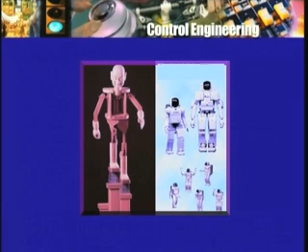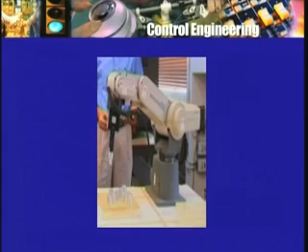Not a very difficult job for a robot or an automatic system to do. Pick up something from a place where it is expected to be, a known thing, lift it and put it down at some other specified place. Does not require too much smartness. Now in this case, the movement of the robot arm can be completely predetermined. So the robot arm moves in a particular way, starting from, say, some standard position, goes down to that object, and then if it is holding the object with a pair of pincers, some specific action of the pincers will take place, and the robot arm then will swing around till the object is very close to where it is to be put, and then the pincers will release the object.

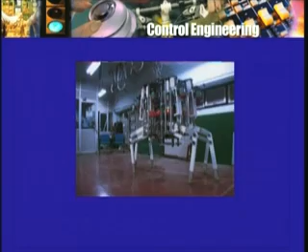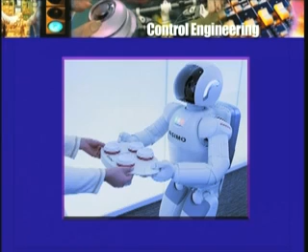So there is no feedback being used here. Of course, the robot engineer has done his previous calculations as to how the movements should take place, and somehow he has arranged for those movements to take place as the robot goes on doing its job. But there is nothing online, so to speak. There is a definite sequence of actions, and the robot follows that sequence.

Of course, as we can expect, if something goes wrong, the whole sequence will still go through, but it will result in some problems. For example, suppose the object which is to be picked up is missing for some reason. Then what will happen? The pincers will try to close on that object but will fail to close, and maybe the robot will just swing around and take that object, which is not there in its jaws or pincers, and put it down, and of course there is no object to put down.

So even with such simple robots, there may be some overall supervision required, or some feedback in the form of whether an object has actually been picked up or not may be built in. So once again, as I said earlier, there is hardly any control system which does not use any feedback.

One more example of a different kind, and which is in the news nowadays, it has been there for some time, is that of launching a satellite. That involves firing a rocket from the ground and taking the satellite up to a particular height or altitude, and then launching the satellite into a suitable orbit.

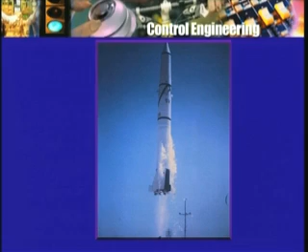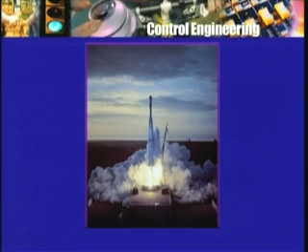Now in this case, once again, the space agency people do all the calculations previously as to exactly how the rocket engines should be controlled, how the orientation of the rocket should be changed, when the satellite should be released, when the thrusters which the satellite may have to orient it properly should be fired, for how long, and so on. All these things are pre-calculated.

But once again, there is usually some feedback on top of it. The space people will check whether things have actually happened the way they were supposed to happen. For example, the orientation of the rocket, the orientation of the spacecraft, and so on. Although they would have done their calculations beforehand, and they are more or less sure that things will go according to their calculations, still, finally, some element of feedback is necessary, because things can go wrong.

So there is this difference between pre-timed, pre-programmed or predetermined control action versus control action which is online, so to speak. That is, what will happen will depend on what has actually happened. The traffic control system was a pre-timed or pre-programmed system, so also the robot doing a very simple job, and the launching of a satellite would also be of the same kind. But if we come to the air conditioner example, there the action is a little different.

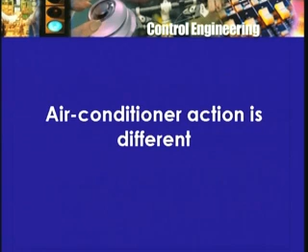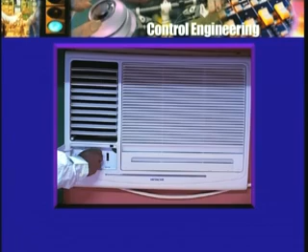I mentioned that the air conditioner's thermostat does not really maintain the temperature absolutely constant. The kind of air conditioner I talked about required that the air cooler be switched on and switched off.

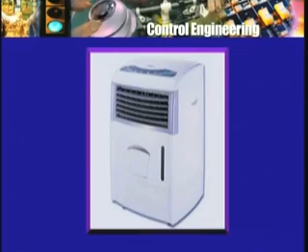As the outside temperature is high and people have come in, the room is hot, so the air conditioner is turned on. The temperature is higher than desired, so cooling is kept on. Then the temperature reaches the desired value and perhaps goes slightly below it, so the cooling will be turned off.

Because of the heat of the people present or changes in outside temperature, the temperature will start rising again. This time, when it exceeds the desired temperature slightly, say 27.1 degrees Celsius, the air conditioner will be turned on again. So there is an on and off action taking place all the time.

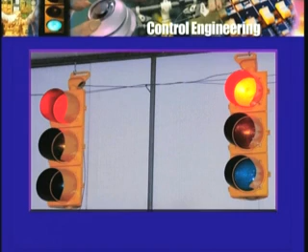However, all this is not predetermined or pre-timed. It is not that the compressor will be on for 30 minutes and then switched off for 15 minutes, and so on. Unlike a traffic signal cycle, where the signal is green for 1 minute and red for the next 3 minutes, back to green and so on, the action here is not pre-timed.

Of course, if one could know beforehand what was likely to happen—for example, if the outside temperature was going to remain absolutely constant at say 30 or 35 degrees Celsius, people in the room were going to be there all the time, and there was not going to be any heater or other source of heat—given such ideal conditions...

...it would be possible to figure out an on-off cycle, or to select the volume of air circulated or its temperature, so that the room temperature is maintained exactly at the desired value. In our case, it was 27 degrees.

But all this is under a very ideal situation: the outside temperature remains constant, the inside sources of heat are not changing, and therefore a constant amount of heat removed results in a constant temperature of the room.

If one could know about all this beforehand and pre-calculate everything, then there is no need for feedback, no need for a thermostat to check the temperature and turn the air conditioner on or off. One would have made calculations beforehand, set the desired volume of air at a specific temperature, and be confident that the desired temperature will be obtained.

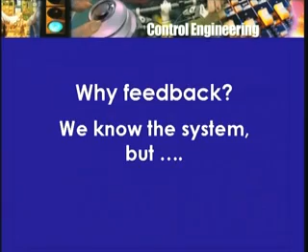But in an automatic control system, one will need feedback for reasons of this sort. The system one is supposed to control, one knows about it fairly well. In fact, you cannot control something if you know very little about that system, or devise a control system unless you know what that system is like.

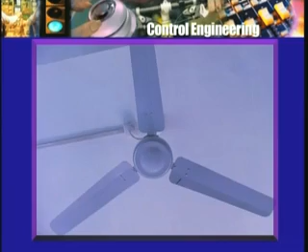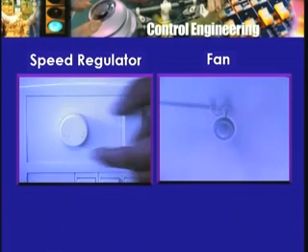Take the simple example of a ceiling fan. What kind of regulator and what design one should have will depend on the fan. If it's a small fan, you need a regulator of a particular rating, since only so much current will flow. Whereas if it's a big exhaust fan for a large hall, a current of a different magnitude is involved, and the regulator must be appropriately selected.

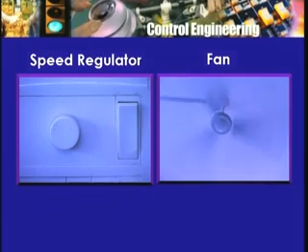So depending on the job, one has to select the control system. You have to know the application, the motor, the oven, the tank, or whatever it is you are trying to control. On the basis of that knowledge, you design the control system and make all the calculations.

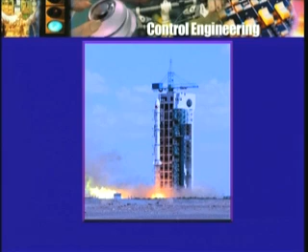Think of the rocket satellite example. We know what kind of rocket engine, its weight, the fuel, the rate at which thrust will be produced, and so on. So obviously we have to know the system before we can control it or devise a control system for it.

But then why is it that one needs feedback? Well, one needs feedback for the reason that although one knows the system to the extent possible, one may not know it to 100% extent.

Very often there are things in the system which you cannot determine beforehand very precisely. There are things which might change with ambient conditions. No system is completely isolated so that it is guaranteed to behave exactly the way you expect it to.

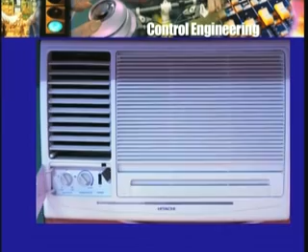Take the room air conditioner example. We have control over the room air conditioner, but we have no control over the sunlight, unless you want to design some control over the sunlight. So whether it's going to be cloudy or sunny, what the temperature outside will be, whether 35 or 30 degrees Celsius, how many people will be in the room, how many lights will be on, maybe some other sources of heat, the cooling capacity of the compressor - all these things, although you try to find out beforehand as far as possible, are not fully known.

A general broad term for this could be uncertainty. You are not very sure about the system, or more important than the system, perhaps about the surroundings, about the environment in which the system has to work.

A typical example of uncertainty is power supply voltage. In fact, even the existence of a power supply, one may be uncertain about. And so we have standby or backups. So in case the power fails, like for example you are watching me on your TV screens, if the power supply goes and you want to continue watching me, you will have to provide some standby power supply.

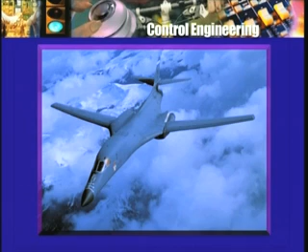So there is a difference between a parameter change or the lack of complete knowledge or uncertainty about a parameter value, and a disturbance like a sudden increase in temperature, say the sun coming out of the clouds, or in the case of an aircraft there is some turbulence or a sudden gust of air, maybe the weather is stormy, the aircraft is flying through a cloud, and so on.

So you have uncertainty, you have disturbances, because of which what you may have pre-calculated or predetermined may not produce the result you expect. So if you want the system to be controlled properly, you would like to see what is actually happening and take any corrective action.

If the supply voltage has gone down and because of that the intensity of some light is low, or some current is low, then I may intervene if an operator is sitting there and try to adjust things so that the current is brought to the expected or desired value, and so on.

So this is the reason for using feedback: what you expect may not happen, and so one would like to keep watching constantly, monitoring, measuring, and then change the course of action or take an appropriate action.

Now this is what the thermostat is doing. The thermostat monitors the room temperature, and the moment the room temperature goes above a certain value, maybe because of environmental factors or a lot of people coming in, the thermostat turns on the air conditioner. After some time the temperature goes down, maybe a lot of air has been circulated or the outside conditions have become cooler, the temperature goes down, and the thermostat intervenes again and switches off the air conditioning.

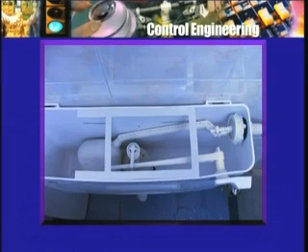One of the earliest industrial examples of feedback - I don't know whether you have read or heard about it - I mentioned, of course, the ancient tank filling and flushing system, and there is feedback used there, although there is nobody watching, there is no literal measurement being made. But the float valve is an arrangement that provides for the inflow to stop when the water level reaches a certain height, and then when the water level falls below, the flow begins. So that's a very ancient example, but that was not for an industrial application.

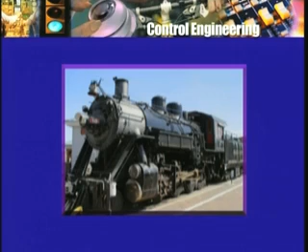One of the earliest for industrial applications was for the control of the steam engine. Before the steam engine was used for locomotives, that is for providing transportation, it was being used basically for grinding of grain for mills, and then subsequently for various other operations.

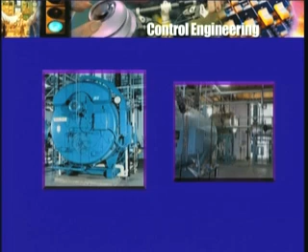Now the steam engine, of course, uses steam coming from a boiler. The boiler has water in it, it needs a fuel supply. Then there is the wheat which is to be ground, the amount of wheat, the quality of wheat, the condition of the grinder. All of this can result in a situation where the grinding is not proceeding satisfactorily because the steam engine is not producing a proper speed of the shaft of the grinding wheel.

So let's say it is desired to keep the speed of the grinding shaft constant in spite of, or irrespective of, maybe the quality of the wheat, maybe the quality of the fuel used in the boiler, and things like that.

So if a human being were to do it, he would see that the speed is falling, the grinding wheel is slowing down, and so he would control a valve which will admit more steam into the steam engine. Of course, to produce more steam, you may have to increase the heat given to the boiler, and because the steam is going to be coming off from the boiler in larger quantity, you may have to check the boiler water level and whatnot. So a human operator would do the job, and would do it reasonably well, but as we said earlier, the reliability and the accuracy are limitations.

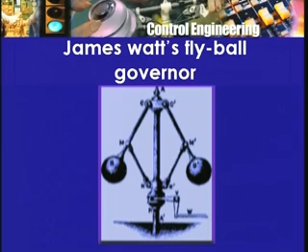So he devised this mechanical arrangement called the fly ball governor, using the centrifugal force kind of action. If the grain was such that less torque was required to grind it, the grinding wheel would speed up, then the two fly balls would fly away with the increased speed. That flying away movement of the fly balls, by some linkage, led to a valve which controlled the steam flow and would reduce the flow of steam.

On the other hand, if there was some problem with the fuel itself, one would have to modify this a little more, but again the same thing would happen. If the amount of steam going is not adequate, the speed would go down, the fly balls would come closer, and the levers operating would open the valve more, so that more steam would be admitted.

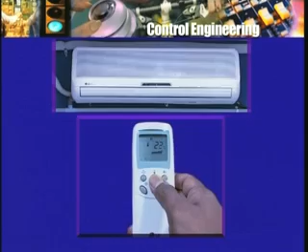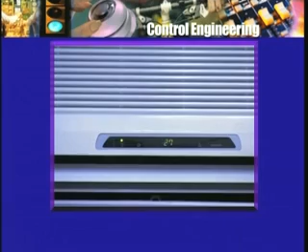This is somewhat similar to our room air conditioner example. The temperature is to be at 27 degrees Celsius, but we find it oscillates between two limits, 27.1 and 26.9 degrees Celsius. In the case of the fly ball governor also, such a thing happens. The speed will not be absolutely constant, but will vary between two limits, though the variation can be tolerable, much less than what it would be without this feedback action.

We'll look at this later on in more detail. This is related to the concept of error, and there are some misconceptions around this concept. In your control theory or control systems book, there will be a long chapter on control system error, types of systems, and so on. But there is some confusion there, and we'll look at it in detail and try to clarify what exactly one means.

So feedback is used because of uncertainty, lack of complete knowledge, disturbances, and so on. For a regulator type system, when something is desired to remain constant, but things may act on it to change it which are not known to us—disturbances, changes in parameter values—it is necessary not just to make some pre-calculations and get the thing going without looking at it, but to keep on monitoring it and make changes that can bring the desired variable closer to its desired value. This is one of the most important reasons for using feedback.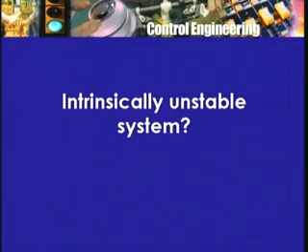In fact, there are hardly any intrinsically unstable control systems. There are—I'm not an aeronautical engineer, but my aerospace or aeronautical friends tell me that an aircraft with its control surfaces for controlling the various motions of the aircraft is what may be called an intrinsically unstable control system. And in fact, if you go back to our older example of a bicycle, then a bicycle also, one can say, is an intrinsically unstable control system.

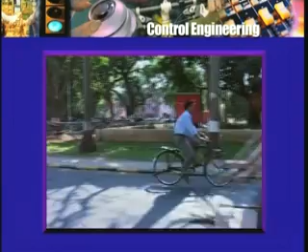If you just have a bicycle, hold it for some time and then leave it, it's not going to stand there just like that. It's going to fall. So a human being riding the bicycle constantly needs to assess what's going on through the kinesthetic sense and keep balancing it. Once in a while something happens and we fail and we fall. So even a bicycle is an unstable system, or what is called, in case of stability, one talks about various kinds of stability, neutral stability and this, that and the other. So you can think over this example.

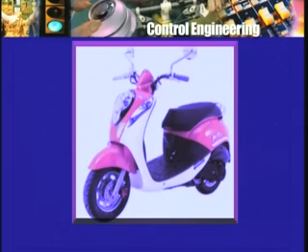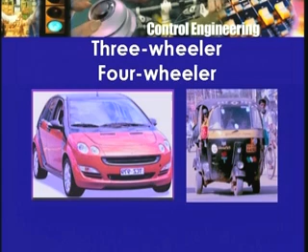Similarly any two-wheeler will most likely be an unstable system, it requires a balancing act. But a three-wheeler or a four-wheeler does not suffer from that problem. A motor car driver does not have to balance his car. Of course, when he steers around a curve at high speed, he has to take care. But normally he does not have to worry about balancing.

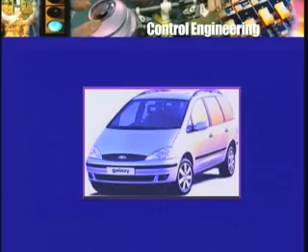So to repeat, the main purpose of feedback is not to make a system stable, or the main reason for it is not because the system is unstable, because in very few cases will the system be unstable to start with. The main reason is uncertainty, lack of knowledge, disturbances about which we don't know, parameter variations, and so on. So the control system designer has to think of how this feedback should be used to control the system when such things happen, when there is disturbance, when there is a parameter change. What kind of changes in the control action should be made?

There are various choices. Once again, we are going to discuss that later. The chapter on control system design is typically what looks at this.

So feedback will almost invariably be used in regulator type systems. There is hardly any regulator type system which you will find that does not have some feedback. In the final analysis, some human feedback, some overall supervisory feedback will always be there.

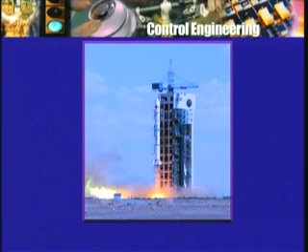In the case of the rocket launch or the satellite launch also, there are so many things that can happen over which you have no control. The weather, as the rocket ascends, the airflow, the density of air, quality of fuel, variations in it. Modeling a rocket motion is not that simple. One has to make approximations. So we really don't know 100% exactly what is going to happen.

So feedback is used there also. At the same time, in that application, one does do some pre-calculations. No system is designed without any pre-calculations. And even the feedback is designed, is calculated. So it's not that you can take anything and not know anything about it and use feedback to control it. You may succeed in doing something, but there is no guarantee that you will do a good job. So pre-calculations or pre-programmed action is useful and important, but at the same time, use of feedback is also very important and necessary.

So this is about one class of systems called regulators or regulator type systems. Let us now look at a different kind or class of control systems or control actions. I'll go back to an earlier example, namely steering - steering a bicycle or a scooter or a motor car or an aircraft.

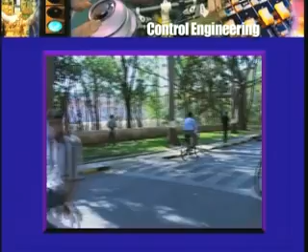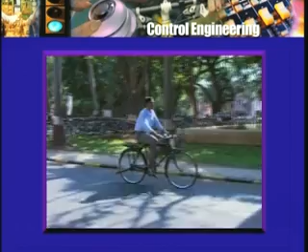Now when you want to go from one place to another and you want to ride your bicycle, is there anything like a regulator kind of action? Is there anything that you want to keep constant, that should not change? Maybe you would like to pedal at a constant speed, but no, that's not the main problem or the main point of what you want to do. You want to start at a particular place and reach another place, and there is a road or some pathway which you have to follow.

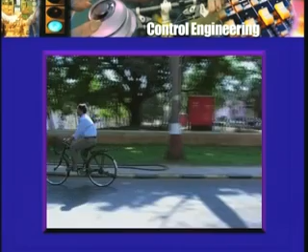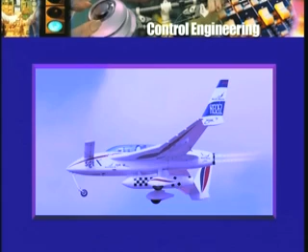Similarly, when you take a ride on your scooter or in a car, or you have an aircraft which flies from one airport to another, you know the path that you would like to follow. Of course, it can happen that you have never been that way before - the path could be new to you, but still there would be a road reasonably well defined so that you know what to do, and there would be some signs which tell you what you should do. Certainly no pilot flies an aircraft without knowing beforehand the geography, the location, the area over which he is going to fly. The word course is used for this - there is a predetermined course which you are required to follow.

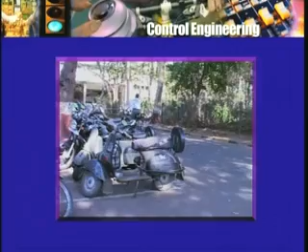And you get on your bicycle and get going. The road is straight, you ride straight. The road has a left turn, you do something to the handlebars and your bicycle turns left. Of course, when it turns left, you take care that you don't hit the footpath or go too far on the right side. There may be an oncoming vehicle. So you are constantly watching what's going on.

By and large, you have to follow a specific course. The course may be predetermined, if it is a bicycle ride that you have been taking every day from your hostel to your department and back using a specific road, then you know it so well that maybe even in your sleep you will be able to do it. The whole course, the terrain, the road is all well known. Everything is familiar.

But the course may not be predetermined. There may be sudden changes. The road is under repairs, it's closed, or a left turn is no longer allowed. So you don't know beforehand what's going to happen, what path you are going to follow. The course is not completely predetermined.

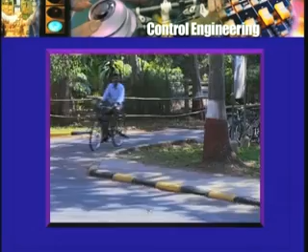Yet you would like to steer your vehicle, and here by steer I mean not only direction but also control the speed. Getting onto the bicycle is one thing, getting off it is another, but maintaining the speed or changing the speed depending on terrain conditions, and keeping the orientation so as to follow the course - all of that I include in the word steering. This is a major control job, and human beings are doing it day in and day out.

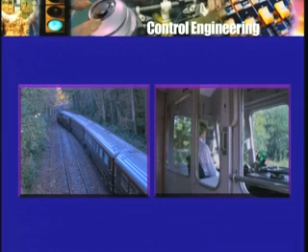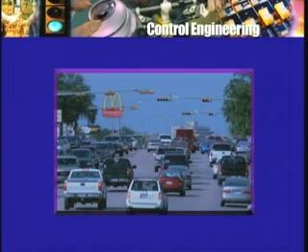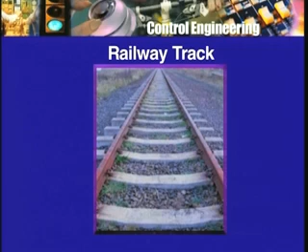The job is a little easier for perhaps the railway locomotive driver. Why? Because the track is already there. Unlike the road, where you have to be on the correct side, not go too far to the left or too far to the right - there may be a ditch, a pile of dirt and so on - the railway track is reasonably fixed, it's maintained properly. In fact, that's a big job, track maintenance.

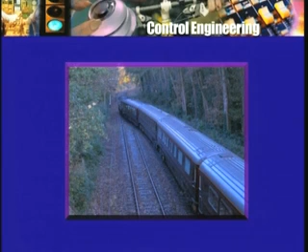So the locomotive driver has to simply start the locomotive, decide upon a speed depending on the speed limit, and keep going. Of course, that's not true - there are other things he has to do. If it's a single line track, then you know what kind of problems are involved. The track condition may not be the same. There are curves, and around curves you have to reduce the speed. There may be an upgrade or a downgrade.

So even there, some control action is required all the time, and it's not completely predetermined, although ideally people are trying to have automatic trains - trains without any driver which will go from one place to another. But even with such trains, the use of feedback will be almost unavoidable, because what you knew about the track beforehand may not actually be the case. It may snow - we don't have that problem in many parts of our country, but if there is snow, what do you do? Even if there is a track completely given to you, with no other traffic, no other locomotive or train crossing your path, no obstacles, there could still be changes like rain or snow.

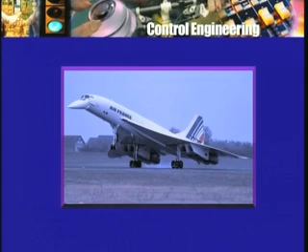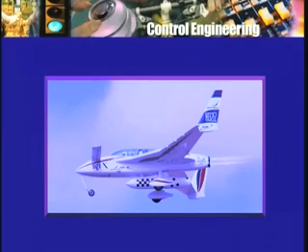So sensing, being on the lookout for what's out there and checking whether the course is correct or not, and if not, making some changes - for an aircraft pilot, this is absolutely necessary, because unlike the railway track, there is no track in the air. So he takes off and tries to set a course and stay close to it, but there are things not under his control. If it's cloudy, there are gusts of air and so on, so he deviates from the course, and then takes corrective action from the actual course so that the desired course is again followed. They have landmarks and so on.

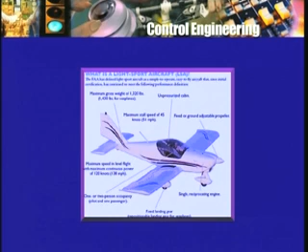So here is a different kind of control situation, which is not of the regulator type. It's not that something is to be maintained constant - temperature, pressure, speed, or what have you. It is that something called a desired behavior, position with respect to time or location on the map, as you fly the aircraft, where you should be at this moment of time roughly - that is known, and you have to try to follow that. You have to try to stick as closely as possible to that desired behavior.

Such systems are called follow-up systems, for an obvious reason - they have to follow something which is being specified. The main thing is that what is specified is not usually specified much beforehand. But as you go on, you are told, do this, stay close to this path, or whatever.

Another name for such systems, and the reason for that name, is the particular application during the Second World War, when aircraft were being used, and even rockets, as we know, were being used as part of the war effort, and therefore you had to devise a system to gun down enemy aircraft or enemy rockets. Today, of course, one would not talk about aircraft and rockets in the old sense, but about missiles.

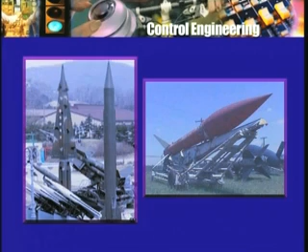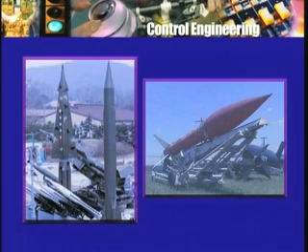And you have to intercept a missile. You have to first of all find out whether there is a missile in your airspace and then track it. This is another term that is used, and then if possible intercept it.

In the Second World War, it was simply a question of enemy aircraft appearing on your horizon, and then you have a gun or a set of guns. So you have to keep on orienting them properly, and then at an appropriate moment take a decision to fire a shot and shoot down that aircraft.

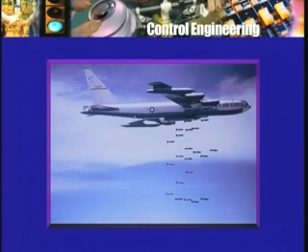This was the time when radar had just been introduced, so it was not really a very sophisticated kind of tracking system. Very soon, as the war effort went on, radar was developed. So you had this thing which detected the enemy aircraft even before you could see it, perhaps, or if it was cloudy.

And the radar would give you the position of the aircraft and also the distance of the enemy aircraft or the target. So you had this target coming to you, which you had to track with the help of the radar. But that's not all. You just did not want to track it and keep watching it. You have to take action of firing a shell.

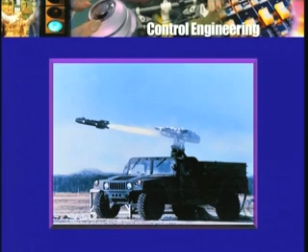And therefore, you have your gun, but the gun is not a small pistol or a revolver. It's a very massive thing, because the shell has to reach maybe an altitude of 2000 feet or a distance of a kilometer or more. So it's a very massive thing, and it has to be moved.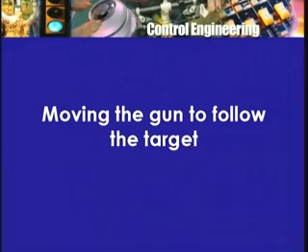So you require a mechanism to move it, and that mechanism would be an electric motor. But you have to keep on moving it to follow the target, not just wait till the target was overhead and then suddenly move the gun, because that would not be possible - it would take quite some time to move it. So in a very crude sense, the position of the gun should follow the position of the target as closely as possible. There's more to it, because it's not enough to know the position.

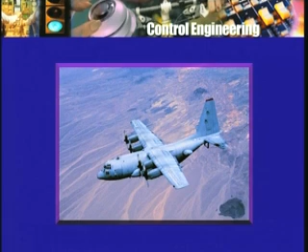One should anticipate what the target is going to do. But at least you should keep track of where the target is, and the gun should be oriented towards the target as closely as possible, so that eventually when you take a decision to lob a shell, there is a good chance of the target being struck.

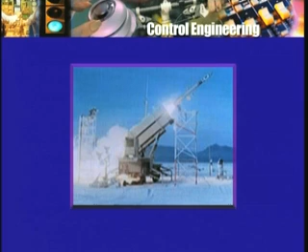Today, of course, things have become much more sophisticated. You have missiles which are launched from Earth, which may be launched from an aircraft. All kinds of interceptions are possible. So certainly this is a very hot topic today. But this is the application that gave rise to this term, servo mechanism.

Servo refers to, or comes from, a Latin word which is there in the English word 'servant' - a slave, essentially somebody who follows your instructions, does anything and everything that you tell him or her. And mechanism, because obviously there was a gun which was to be moved, which required a mechanism, electric power or motor, and ways to control the motor.

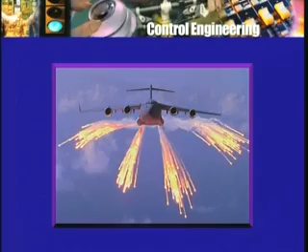Like the aircraft, there are various kinds of controls or aspects of movement of the gun. You can think of movement in a horizontal plane, so azimuth, and then the gun has to be raised or lowered, so elevation - azimuth control, elevation control, and things like that.

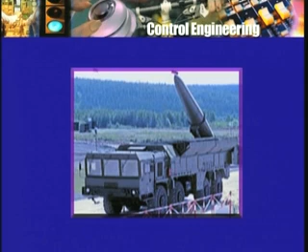Instead of a gun at a fixed location, you may have a gun which can be moved around. And again, instead of a gun shooting a shell at an aircraft, it could be something else - a tank, a military tank, which will fire a missile at another military tank of the enemy.

So there again there are similar problems, although the guns may not be as heavy, but the added problem is that the tanks are moving. Your own tank is moving as well as the enemy tank. So this is a different kind of control problem altogether.

Unlike the regulator type system, where of course there is something desired, namely temperature should remain constant at 27 degrees Celsius, or voltage should remain constant at 230 volts AC RMS, there is something desired here, but that something desired is not constant. Not only that, that something which is desired is not even known beforehand.

Nobody tells you beforehand exactly how the target is going to move, because there is a pilot there, he might make some maneuvers which are totally unexpected. It may be a new aircraft about which you don't know much. So you have to follow something which is not known to you, and yet you have to follow it as closely as possible. So this is a different kind of situation altogether. And this was of course a very important class of control systems that was studied during the Second World War.

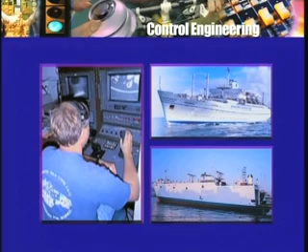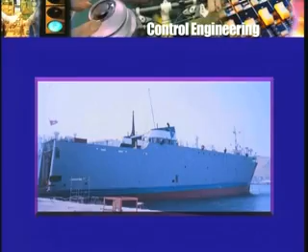There were of course earlier applications, but they were more like regulator type system applications. For example, steering of a ship was a major control application. It goes back to old days. Ships have been steered for a long time, but when ships became heavier, had more powerful engines, more speed, more tonnage and so forth, the problem became more difficult, because there is the propeller and the rudder on the ship which has to be moved in order to achieve a certain speed and direction.

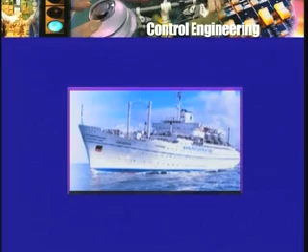So when going from one harbor to another, one would have a preset course, known beforehand. You keep a certain bearing, keep going in a definite direction. So in that sense it was a regulator type problem. You had to just keep the ship going in a particular direction in spite of disturbances - wind, motion of the water, waves, turbulence, storms, whatnot. So in spite of that, you have to keep the ship on course. That was almost like a regulator type system.

So such control systems were studied. One of the earliest work was done for steering of a ship. Of course much earlier work was done, as you can expect, for the control of the steam engine and the James Watt governor. In fact, Maxwell, whom one knows for his contributions to electricity and magnetism, or the subject called electromagnetism, bringing the two together, also studied the action of the governor from a mathematical point of view, and found out that there were some problems or defects with the governor, and some improvement could be made. That was around 1860s.

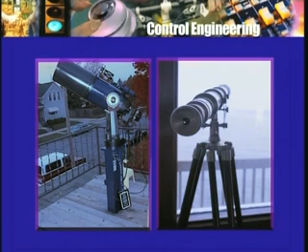There were problems of the servo mechanism kind even at that time, in astronomy. In astronomy you want to look at the sky, and unfortunately the stars don't stay fixed, they keep on moving from east to west. So you have to keep your telescope moving to follow the stars. Of course the motion of the stars is more or less known accurately. Today one would say the motion is not that of the stars but that of the earth, and the motion of the earth is known fairly accurately. There is no sudden jerk here. The earth is not going to stop suddenly. It has not stopped nor had any jerks. But still you have to move the telescope, which could be a very massive thing, to follow the movement of the stars. So it was one of the earliest of the servo mechanism applications.

And one astronomer, the Royal Astronomer of Great Britain by name Airy, did some study of this application. Again, it involved obviously mathematical studies because you had to move an object, so mechanics, writing down differential equations and whatnot. So in that sense, the theory of servo mechanisms is also quite old. You can say it goes back to 1860s, 1870 and so on.

But the Second World War is what led to very significant increase in the amount of study, in the number of people studying, in the urgency of the situation and so on. So a lot of developments took place in what is called the theory of servo mechanisms. In fact, there are books with that title, Theory of Servo Mechanisms, rather than Theory of Feedback Control Systems. And this continues to be one very important application - servo mechanisms, follow-up systems, or tracking systems. You can use any one of these names so long as the idea is clear. There is some desired behavior, the angular position of the gun should be as close as possible to what is desired, the angular position of the target.

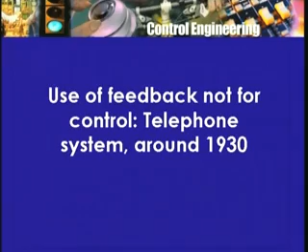Now at that time, the early 30s or late 20s, the equipment was of a certain kind. Today things have changed drastically. There were no satellites at that time, no satellite communication, no microwave towers. All communication was through cables.

There could be wireless transmission, but that wireless transmission was not reliable, was not cheap enough, and it was not being used on a commercial basis. So the telephone system was through cables.

Now you speak into a phone in New York and you want to be heard, let's say in Chicago or in San Francisco. If you think of it as just one wire running between New York and San Francisco, then obviously you will not be heard in San Francisco. In between, amplifiers are required. Otherwise the signal, if you think of a direct transmission, will be just too weak.

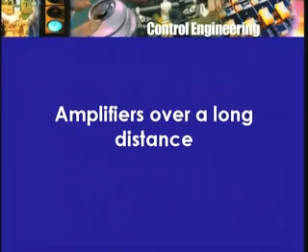So you have hops or stages, maybe every 100 miles or every 200 miles, you amplify the signal and then send it out again to the next hop. This requires a large number of amplifiers put up all over the country at places which may not be so easily accessed. After all, the whole terrain is to be covered, or a lot of it. So the amplifier could be at a remote place.

Now what if something goes wrong with that amplifier? Eventually one will have to replace it. Now when you replace one amplifier by another, how do you know that you have replaced the original amplifier by another exactly like it?

One of the aspects, as you know, as electrical engineers who have looked at electronic circuits, is what is called the gain of the amplifier. The amplifier amplifies the signal maybe by a factor of 100, or by a factor of 1000, from a particular voltage level to another voltage level, and so on. Now this gain of the amplifier, as you know from electronic circuits, is not constant, it can vary over frequency.